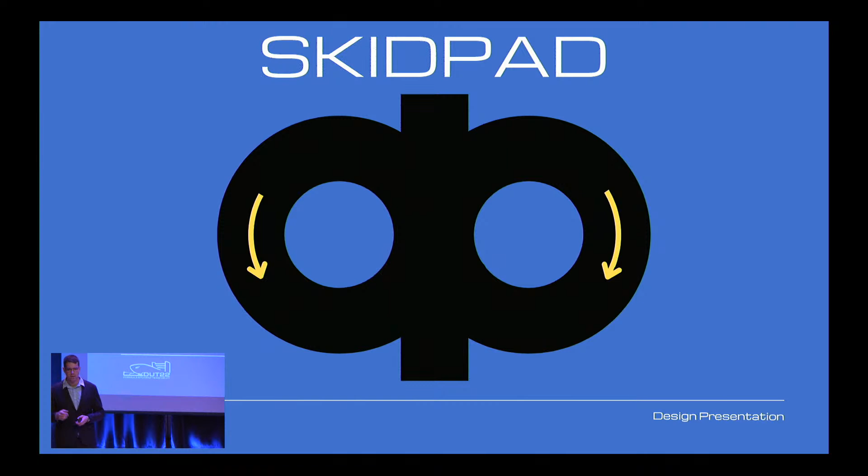As for the next dynamic event, it is the skid pad event. The real advantage of this event is, especially for the more mathematically oriented engineers, they get a steady state in which to examine the performance of the car. So if we show you some footage, again from 2015, they wet the track just to make it more interesting. And you'll see the car is going quick, but it's not speeding up and slowing down.

The driver is trying to find the optimal position to put the pedal at, to find the exact limit of grip, and because the corner radius isn't changing, he can hold it right there, which means you can literally calculate, theoretically, how quickly the car will do a skid pad on the back of an envelope with a pen and a piece of paper.

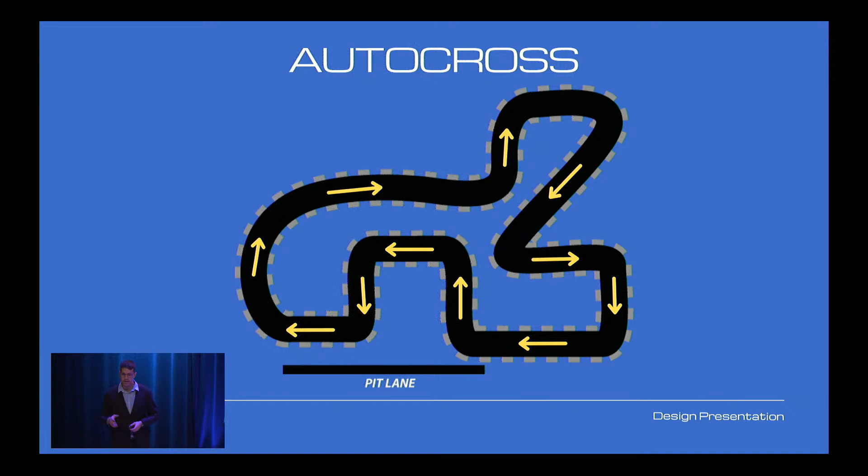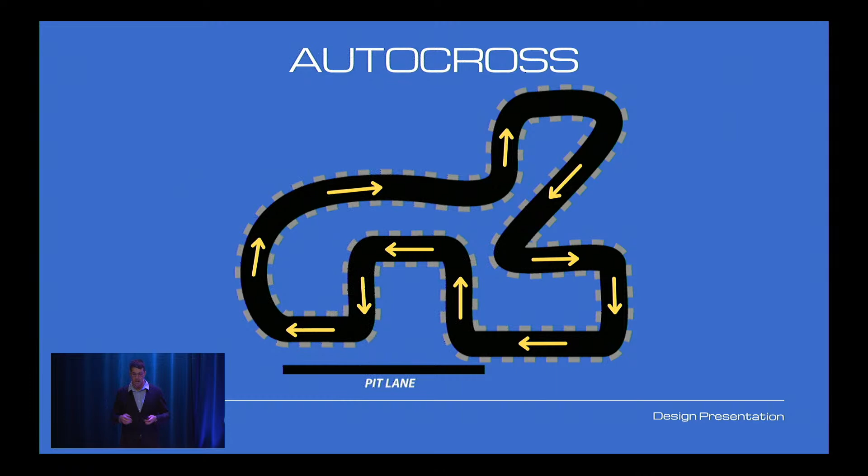Now we start getting to the dynamic events that we'll be more familiar with, especially if you're a fan of motorsports. The first is the autocross, and this is similar to qualifying. The catch is that in qualifying in Formula One or in NASCAR, you get practice. You get hours of practice before your run. For us, the closest thing that the drivers get to practice is you'll have 2 drivers for the autocross. Each of them will get 2 runs, but before they actually do that, they get to walk the track for about 20 minutes. So they've got to make a 3D image in their own mind, remember where the braking points will be, having never seen it, and then get in the car and try to do this.

That is just over 1 kilometer in 55.39 seconds around a track with more than 50 corners on it. I've seen this video more than 100 times, and it still surprises me how quickly they go. This was the first run on the day in Formula Student Austria back in 2019 at the Red Bull Ring. The second driver reviewed this footage, got in the car, and beat that time by a full second. So that's the autocross event.

Finally is the endurance event. This event is worth as many points as all the static events put together. It's included with the efficiency, just like it used to be back in 1981.

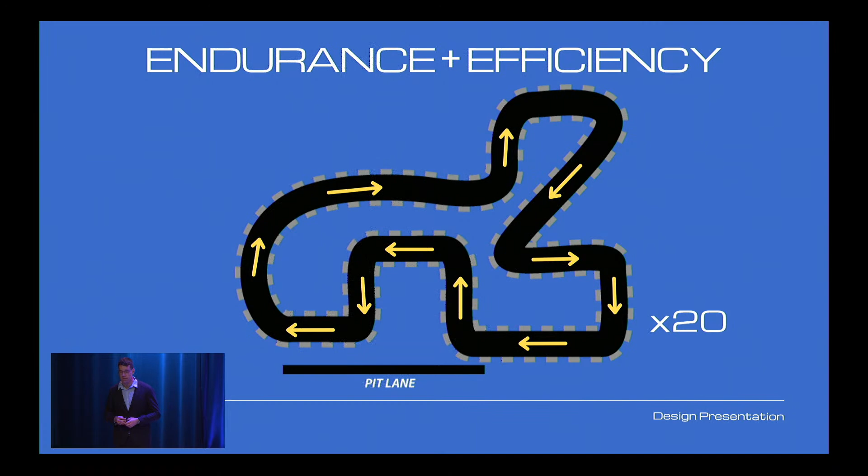And because it's the most difficult of the events, it defines a lot of how you design the car. You need to have a large accumulator in order to be able to finish this event. And then, of course, as Sam will explain, the car has to be reliable enough to do it. It might not sound that difficult, especially in comparison to something like Formula One, where it's 300 kilometers. But to start from nothing and design and build a car in 1 year to be able to finish this event, what we actually see at competitions is that only about 50% of the teams who start finish.

So now we know what the competition is. This has been clearly defined since 1998. And in 1999, seeing the success of Formula Student UK the previous year, the TU Delft in the Netherlands took notice and decided to join in on the fun. And so we built the car that you see over there, the DUT1. It was a proof of concept. We were trying to figure out how to actually do this. So we founded Formula Student Team Delft, and there's a picture of the car in testing.

And of course, even though we just wanted to compete, we just wanted to show up and actually get a car to the starting line, the TU Delft students weren't going to start with something relatively simple like a space frame, which is made out of steel tubes, for their chassis. They went all out with a carbon fiber monocoque from day one, just like they use in Formula One. And they even put a massive wing on it, which you can see in that picture. It's so big, sometimes you don't notice it, but it's right above the main hoop over there. Of course, a large aerospace faculty, not to be left out.

But the car worked. It did what we needed it to do. It took 2 years, and the DUT01, DUT is for Delft University Team. We could take that title because we were the first dream team, as they called it. It made it to the start and indeed the finish line of Formula Student UK in our very first outing.

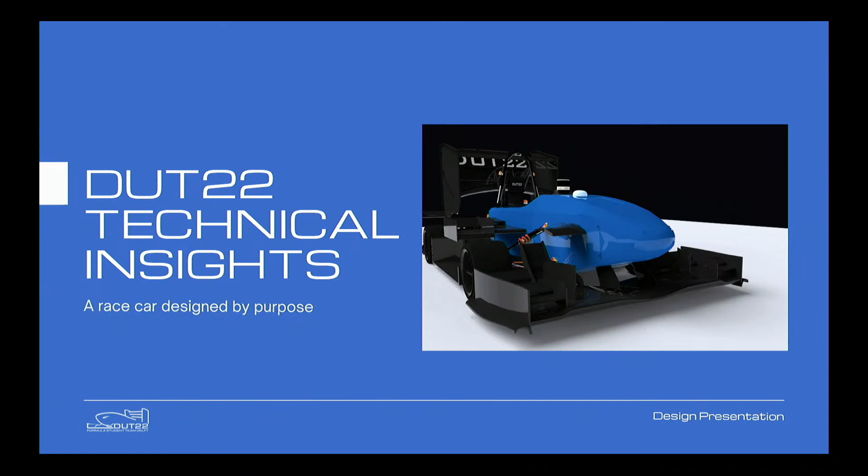I mean, wow, what an amazing car. Look at her. Ladies and gentlemen, you've just witnessed the reveal of the DUT22. I am Sam Pijnenburg, I'm the chief engineer of DUT22, and well, let's just say I'm very glad that you've been able to see this today. My purpose for being here is to take you through our design, what made our design in the beginning, what focuses we have had over the course of this design period to make this the fastest and most consistent car as per our team goal. I will also give you a bit of an idea of what it is like to create the magic and what sort of magic goes into our car actually driving. So let's kick it off.

To give you an idea of where we start, the question that we need to answer is, what does it take to win? We want to win FSG? Great, but how do we do it? Turns out that this question sounds a lot simpler than it is to actually answer. And while that is absolutely no problem, it took a lot of deliberation on how we actually were going to get there at the start of the year. And actually still, throughout every single day of designing, you find yourself wondering this same question again. What does it actually take to win? And where should we go from here?

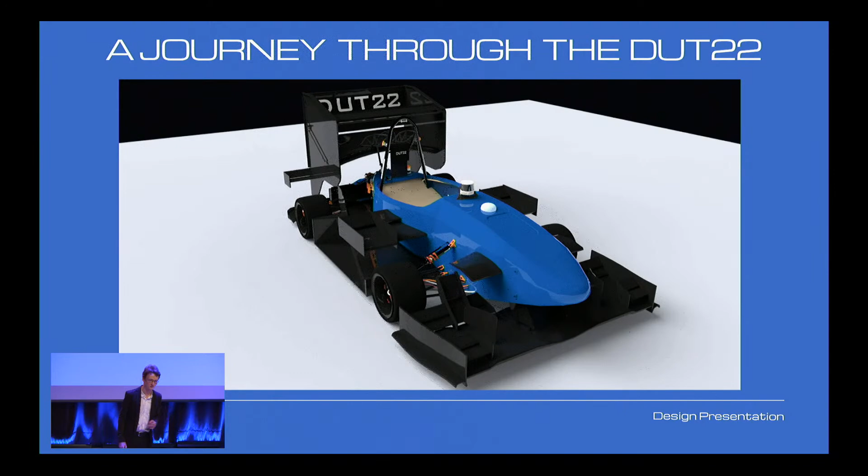In the meantime, we also want to make sure that our driver is comfortable within the car. So fortunately, we have the ability to, within a matter of seconds, change the position of these pedals to accommodate each different driver in our team. Meaning that during the driver change in the middle of our endurance event, it's a matter of seconds for us to adjust the pedal box to accommodate the driver's needs and preferences.

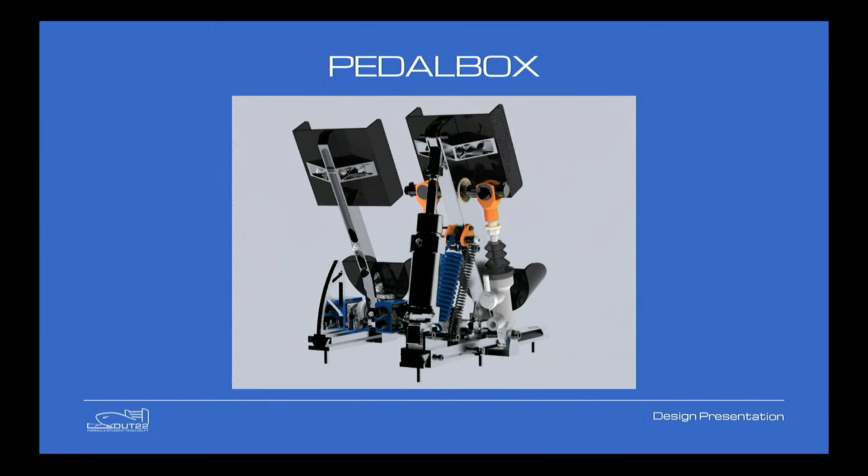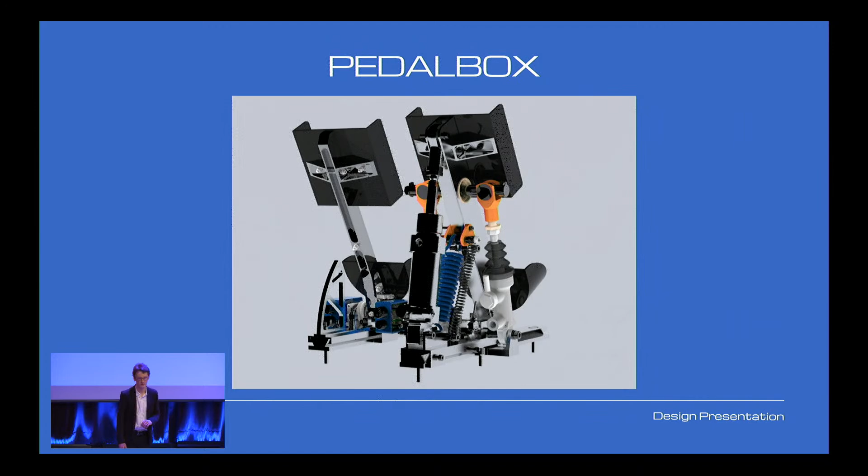Now, the thing is, we have this data then from our driver pressing the throttle pedal. Where does it go? And how does it get there? And this is where the electronics department comes into play. And first of all, specifically, the wiring. Our data from those sensors travels through the wiring, which spreads all out the car, and actually forms the highway network of our car. It connects to every single electrical component you can possibly think of, including sensors and circuit boards and whatever else. And all this wiring, which stretches for more than 1 kilometer, will also ultimately provide us with a car that actually retrieves all the data from all the points that it needs to come from and goes everywhere where it needs to go.

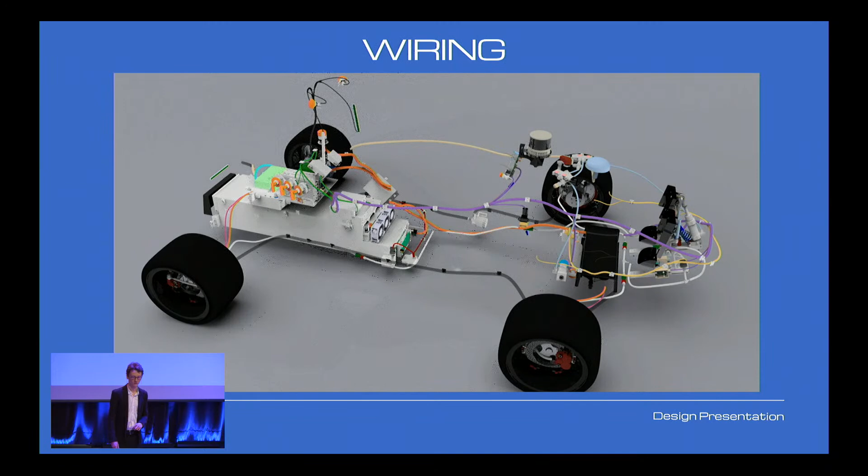Then, with the driver now able to press our throttle pedal and the data actually being able to go anywhere we want it to go, where does it actually go? To a place called the VCU. The VCU, short for Vehicle Control Unit, is a self-developed PCB, printed circuit board, that controls basically everything about our car. It is, if you will, the brains of our car. It also runs something called the controls logic. And the controls logic is responsible for doing all the calculations to provide power to each of the motors in the most optimal way.

To give you a bit of an idea, we have got our signal for the throttle coming in, and 4 motors that independently need to be actuated. So in order to do so optimally, making sure that we actually use the tire grip that we have available at every given time, this VCU does a whole lot of complex computations to make sure that we send power to each of the wheels in the best configuration, such that at any time point, we receive maximum overall torque on the car and actually get maximum performance out of the car.

At the same time, by the way, fun fact, this VCU also provides us with Wi-Fi and actually allows us to read out live telemetry, meaning that we can track everything the car is doing at any given point during testing and during the competitions, which is actually a great feature to have, because it allows us to spot issues right away that we can then quickly fix.

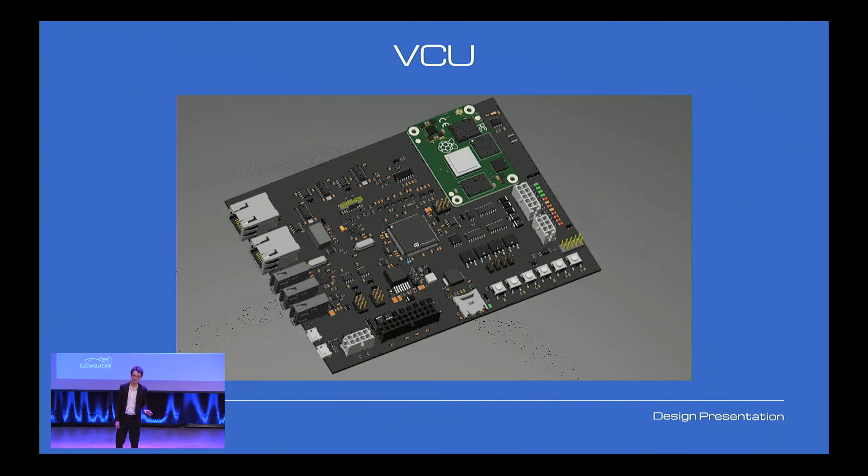Now, the controls logic then calculates exactly what torque needs to go to the motors. But unfortunately, the VCU itself isn't able to provide the power needed. So the data is instead sent to something called the motor controllers. And these motor controllers are something truly very special in our car. They are actually the combination of a whole lot of different disciplines and a whole lot of different people working together tirelessly to make these motor controllers work exceptionally well.

The primary function of this piece of electronics is to provide power to the motors and also retrieve power from the motors and put it back into the battery. So the thing is, the battery is working on DC power. And DC power is like you will find on a regular battery. It has a plus and a minus, and that's it. Now, this power somehow needs to be converted to alternating current, like you will find in your wall socket. And the issue is that it is quite a tedious process and rather hard to control.

However, through a lot of effort and quite some years of development, we've actually been able to do this very well and very efficiently. So these motor controllers are not only able to supply our motors with the AC power that they need, but also retrieve that power, slowing the car down as a sort of braking, regenerative braking, and charging the accumulator again. And actually, that gives us extra efficiency, more points.

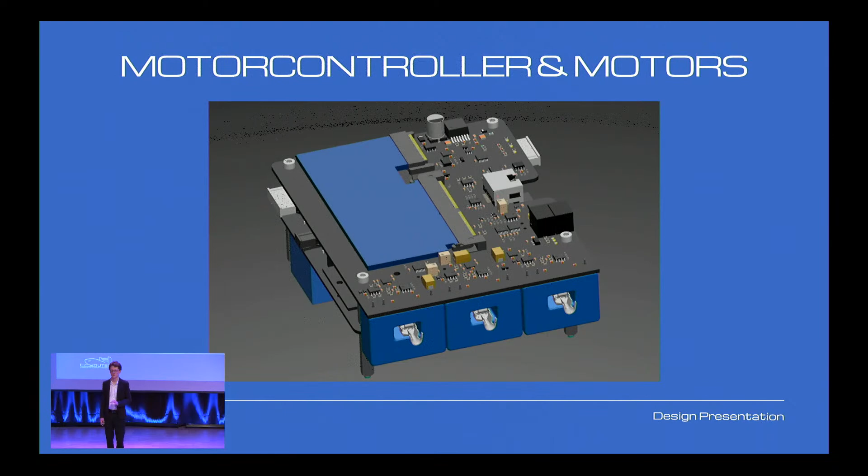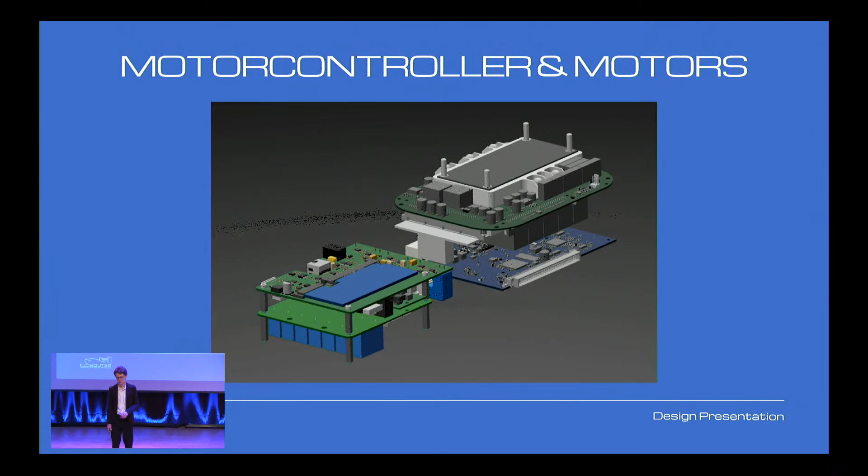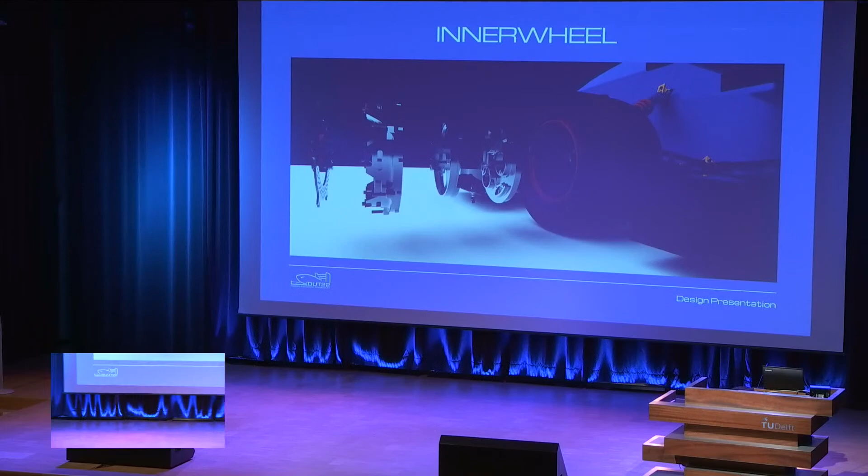Now that we know how to actually power our motors and turn electrical power from our battery into motion, we are going to have to convert that motion into powering our wheels. And the way we do that is through the drivetrain, or the inner wheel. So we've built a transmission, which is, again, custom designed and built, and it consists of several rather complex-looking elements to create one absolutely tiny gearbox. In fact, you'll find 4 on the car, 1 for each of the wheels, each powered by its own motor. These actually fit inside our tires and provide the most lightweight solution you can possibly think of.

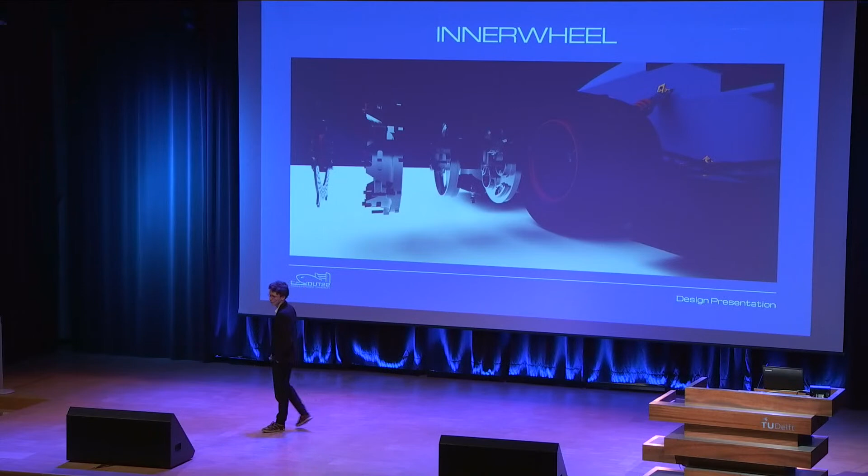Now, the tricky thing with designing these drivetrain concepts is that while they are extremely light, which is great, they are also very small, meaning all parts need to be small and designed very tightly. At the same time, we also need to make sure that it can actually withstand all the forces and do so reliably, because the cornering forces that we experience are rather high.

Now, we've covered quite a lot of the journey already. We've had the driver press the throttle pedal, data being registered, sent to the VCU, controls logic figuring out exactly which of the 4 motors needs what amount of power, and then applying that power to the motor through the motor controllers into our drivetrain. And that's when one extremely important step is still missing. And that important step is black magic.

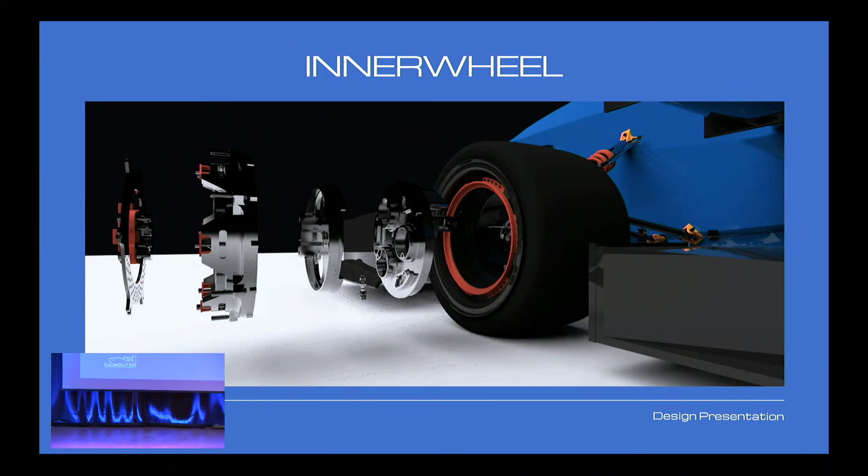Literally, the tires. Here we have one of our examples. And as you can see, it's also tiny, which is a good thing, because again, that means it's extremely light, much lighter than any other you'll find. And these tires have also been self-developed in cooperation with Vredestein. And they've been serving us very well. These tires, as far as we know, are definitely the smallest you will find at any Formula Student competition, and have an absolute ton of grip. So these tires are truly magical.

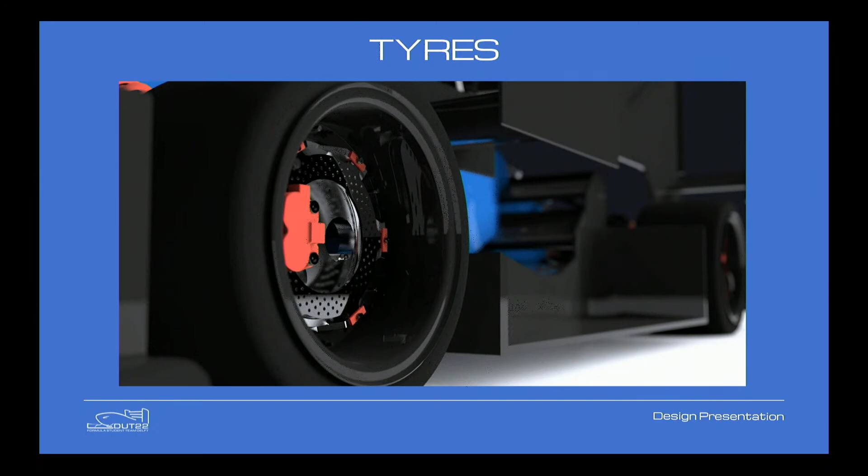Now, tire manufacturing in general is pretty magical, but this is truly astounding. So with these tires, we are actually able to put any torque that we put through our motors through the drivetrain onto the ground. Great, you think, we can accelerate. But no, because now you press the throttle pedal and, well, your tires race off. Unfortunate. So there's some steps missing in between.

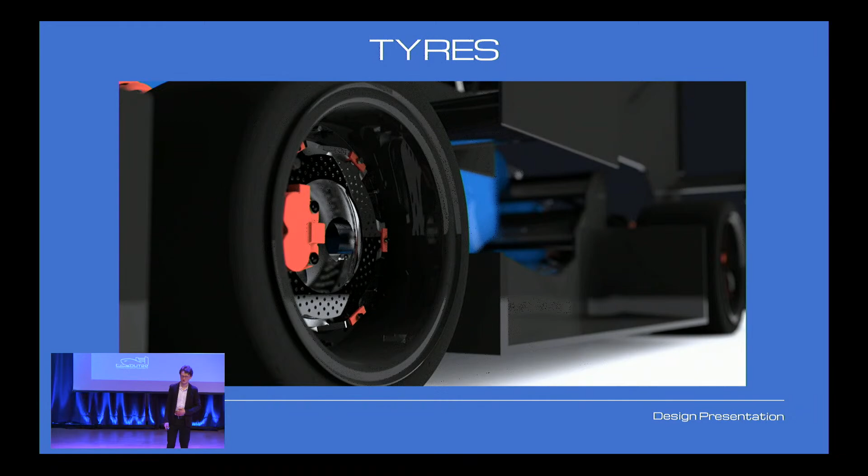And one of those steps is the task of the suspension on our car. Now, the suspension system on our car, again, is quite tricky to figure out. And the reason for that is because our wheels are so small, there's very limited space to play with. So a lot of time goes into suspension, iterating with vehicle dynamics, the department also responsible for the controls logic, to actually make sure that everything fits and also performs optimally.

And what do I mean by that? To perform optimally, we need the car's tires to be at exactly the right place at exactly the right time, be that at angles and also during bumps, cornering, steering, everything. If the tires are not at the optimal position that they can be, then there's no point and we can't extract maximum performance. So we need to make sure that we optimize this design and optimize all the attachment points for the suspension to make sure it works perfectly.

Some other interesting features is that the suspension department actually probably provides the biggest amount of adjustability there is. And this will always add to extra drivability, because any driver would actually be able to have their own setup on the car and actually figure out what it is they prefer.

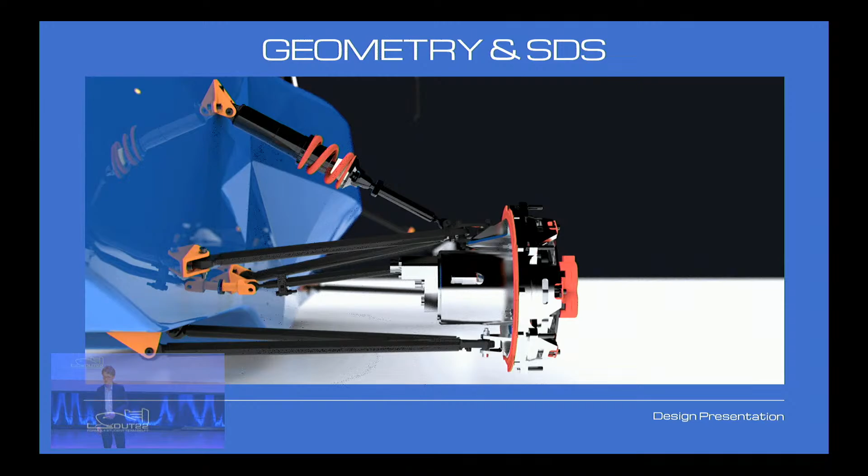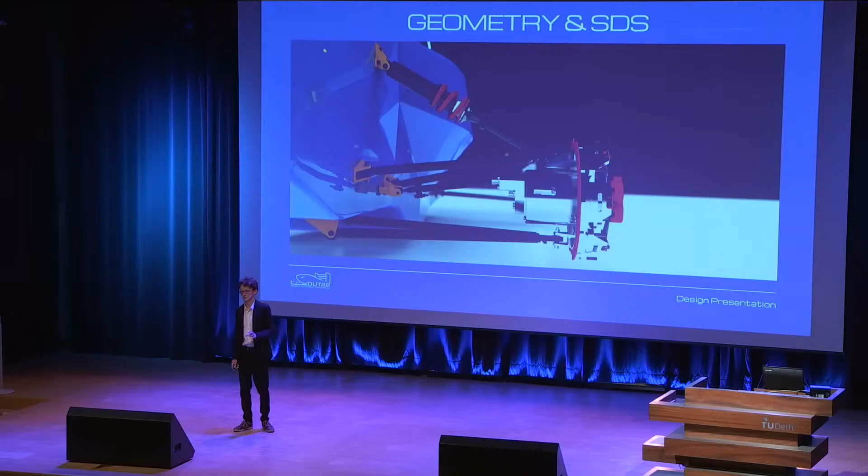That's great. Excellent. But there's another challenge. Because of our extremely high cornering forces, we also need to make sure that everything is actually structurally sound. If it's not structurally sound, we'll see the tires racing off the moment we turn into a corner. And unfortunately, that's no good. So you'll see the suspension department also working hard to run all the simulations necessary to find out if all parts are actually all in order and actually capable of handling all the incredible loads that we see.

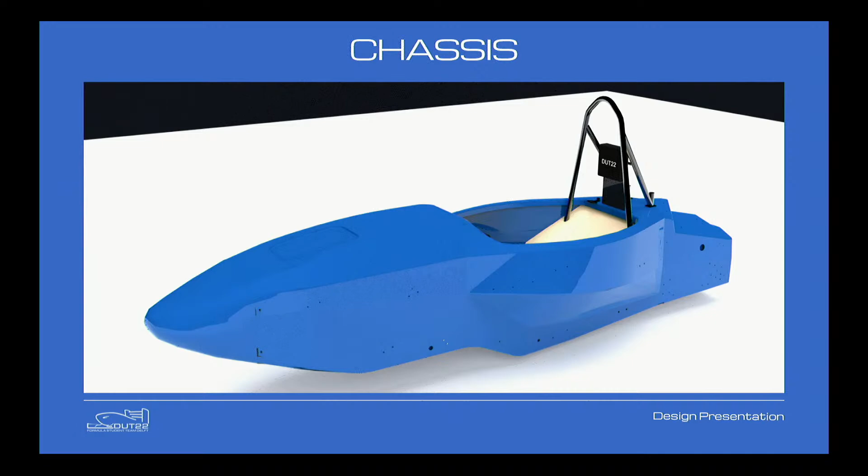So now that we've attached our tire and our whole drivetrain to a suspension, we still need to attach our suspension to, well, a car. And what I mean by a car is actually the chassis. And this is the chassis. It's a carbon fiber monocoque. Carbon fiber because it's so extremely light. In fact, it is only 25 kilograms. And at that weight, if her knee gets better, my grandmother would be able to lift it.

So the thing about the chassis, what makes it truly extraordinary, is that it's made out of, well, carbon, and yet able to resist extreme loads. It is able to resist impacts at 40 Gs from the rear, the front, and all the sides, while only weighing in at 25 kilograms. Moreover, it has to house the battery, the driver, and all sorts of other controls electronics that we could ever put inside of it. It also needs to attach to the suspension, making sure that the wheels stay attached to, well, the car.

So now at least we're complete. Now when we press the throttle pedal, the car will actually move. And it will move fast, believe me. And that's great. The car is light, the car is fast. We've got our throttle pedal connected to our VCU, making sure that we actually get all the performance out of it in the controls logic, then actually controlling the motors through our motor controllers, ultimately turning the drivetrain, turning the wheels, the suspension then driving the car forwards, and then the chassis actually moving forwards.

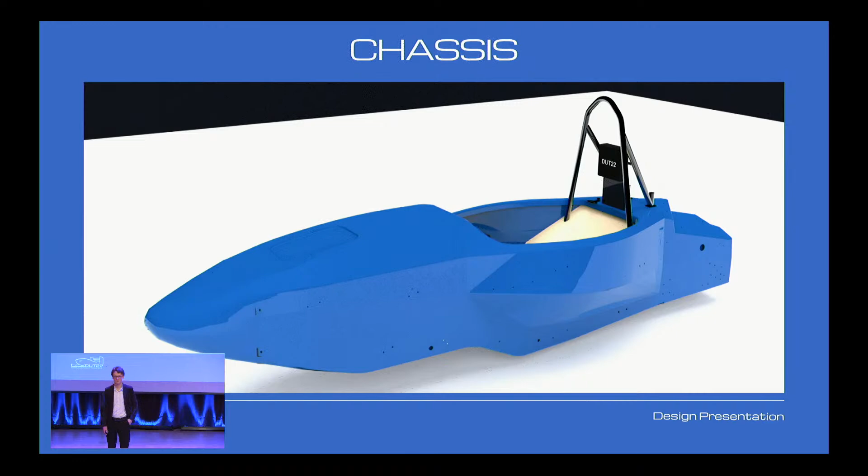But then we get to a corner. So this is where the fun stuff starts. We can press the brakes, that's fine, that works just the same. But the issue lies in, well, we want to be able to corner as fast as possible. And to be able to corner as fast as possible, we want, again, maximum grip out of our tires. And maximum grip out of our tires is the one thing that always contributes to our performance most. All the forces on our car need to go through the tires. So having tire grip available and more of it is absolutely crucial.

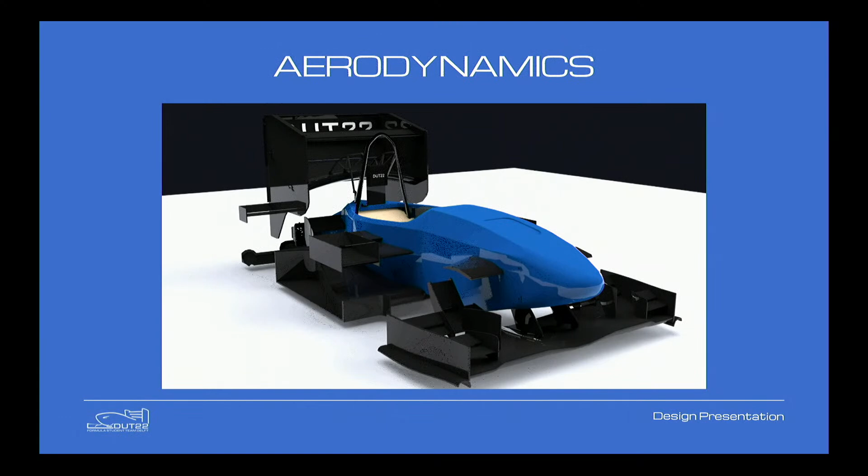Now the trick to doing so is something called aerodynamics. So our aerodynamics department works tirelessly to create something called downforce, which will actually add to our tire grip. To give you a bit of an idea, we create wing elements on our car that will actually push the air up as we drive through it, and in turn then press the car down into the ground, making sure that our wheels are firmly planted on the ground as well, adding extra friction and thus tire grip.

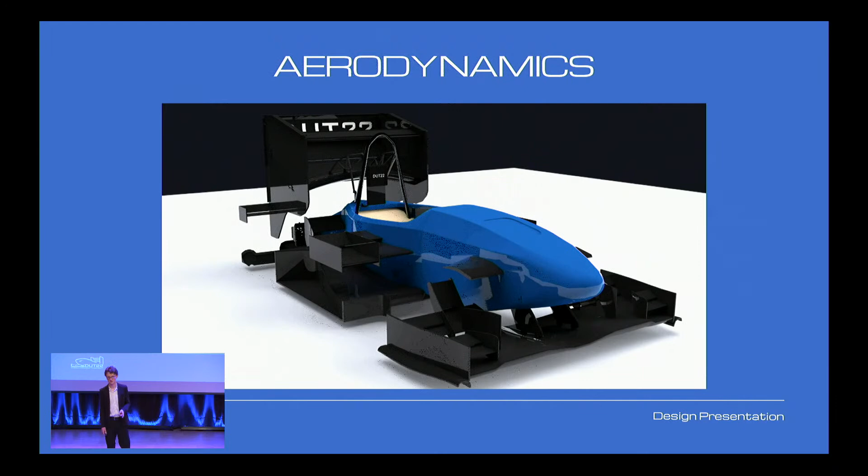That's great. So now we have extra tire grip, and that means we can corner faster. That's great. It takes time off our laps, and that also means that we get extra points and thus a higher chance of winning.

But here's the catch. It's quite hard to design aerodynamics in a way that actually makes sense. And usually when you design something, it tends to not immediately make sense. So that's why we do a whole lot of simulation. And the interesting thing about the simulations that we've been able to do this year is that they are far more accurate than they've ever been before.

So essentially what CFD, so flow simulation, does is generate pretty pictures. And these pretty pictures, as you'll see behind me, actually give us a lot of information about what the car is doing, and specifically what the airflow around the car is doing at any given time. So here you can see one of our cornering simulations that we've actually been able to properly implement this year through the extreme efforts of our engineers.

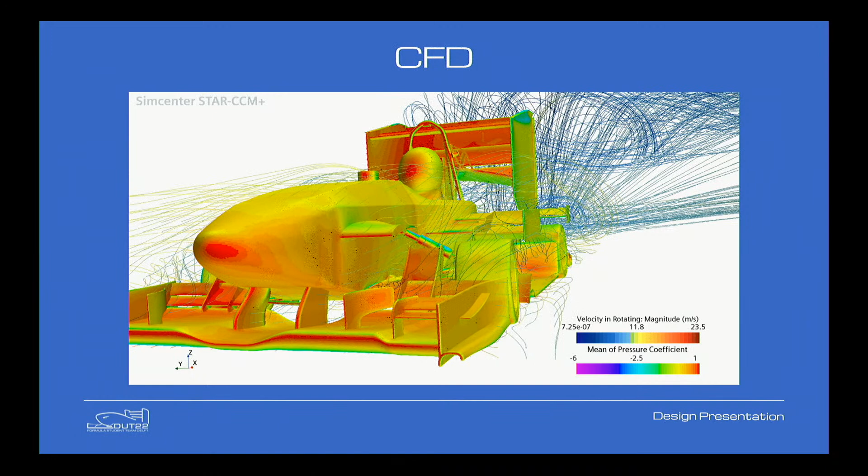And it has already taught us a lot about how the car actually handles in more realistic driving cases. Meaning that the performance we have on track will now actually be closer to the performance we expect due to these simulations. And that's great, because now we can further optimize our aerodynamics package for the actual on-track case, extra performance. Thus more points.

Fantastic. But now there's a problem, always a problem. The problem is the following. In pushing the air up and pressing the car down, the extra elements that we add also contribute to something called drag. So now that our car is actually able to generate downforce, it is also harder to push it through the air.

And that means that we have lower top speeds, but specifically less efficiency. Because all this effort that goes into driving the car through the air is ultimately energy that's lost and that we cannot retrieve from the motion of the car, and thus not recharge the battery with. And losing that energy, losing efficiency, is going to cost us points.

So, naturally we found a true engineering solution. Simply what we do is we open some of the elements on the rear wing, called DRS. You may know it from Formula 1, the drag reduction system. And essentially what happens is that the two upper elements of the rear wing open up, letting more air through, reducing the downforce of our car, but also reducing the drag of our car, meaning that we don't have to push it through as hard.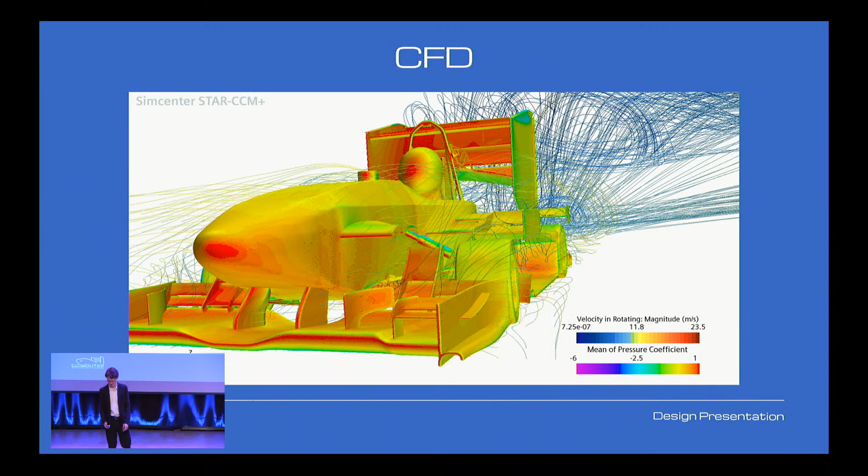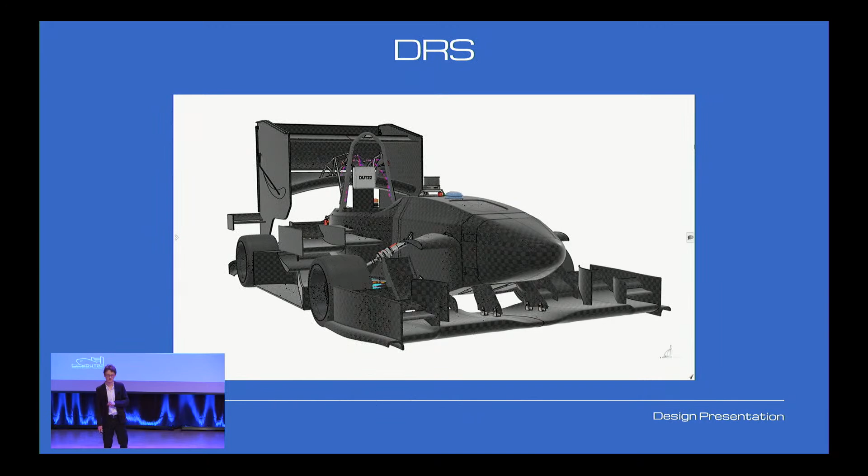But what if there's no driver? Because now we are suddenly met with two extra events that we have to deal with. How are we going to ever deal with not having a driver in our car? And it turns out that there are some key issues that we can actually identify.

Starting with the first, which is not being able to see. A driver is able to see around him, but the car can't, at least not right off the bat. So we mount a sensor on the car, called the LiDAR, which shoots out infrared rays all around it. And a lot of those infrared rays are reflected back into the sensor, and then the sensor gets a feel for how far certain items, points in space, are away. It gets a sense of what is around it.

Now the trick is then to use a lot of clever mathematics and software to deduce where certain cones are in space. This is no easy task, but definitely something that our engineers have been able to figure out rather fast. So what we've been doing is we've been running around our LiDAR on a handcart.

So some of our engineers have been working out. And they've been running skid pad tracks for ages, trying to get data of skid pad tracks and actually seeing if the LiDAR and the software that they've produced would be able to detect cones. And, well, as it turns out, it's definitely possible.

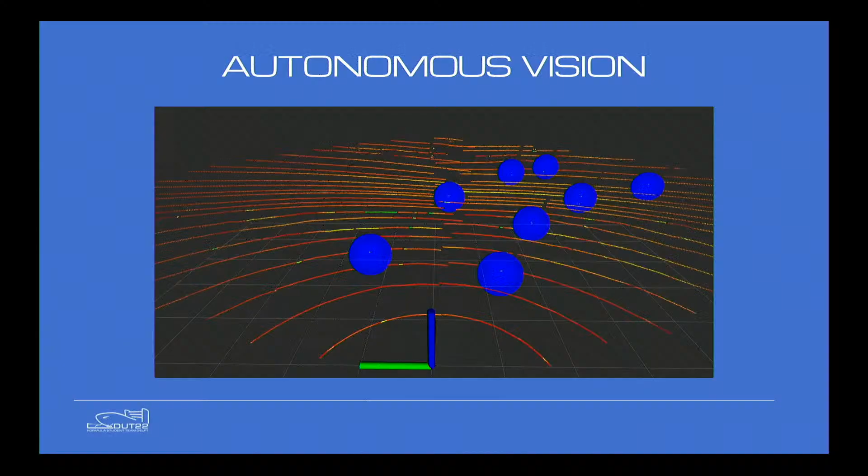So here you can see the handcart driving around the skid pad and all sorts of blue dots lighting up, which are the cones. And you can also see that the skid pad track is even somewhat recognizable. So great, we can now actually detect cones and see where we're going.

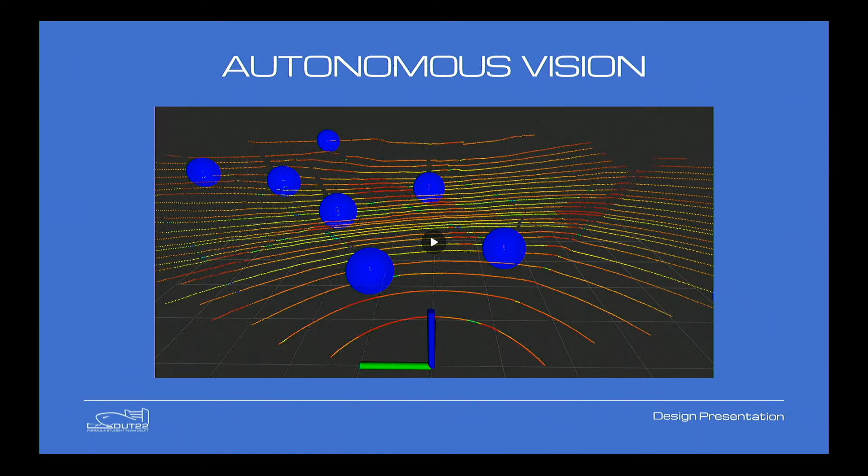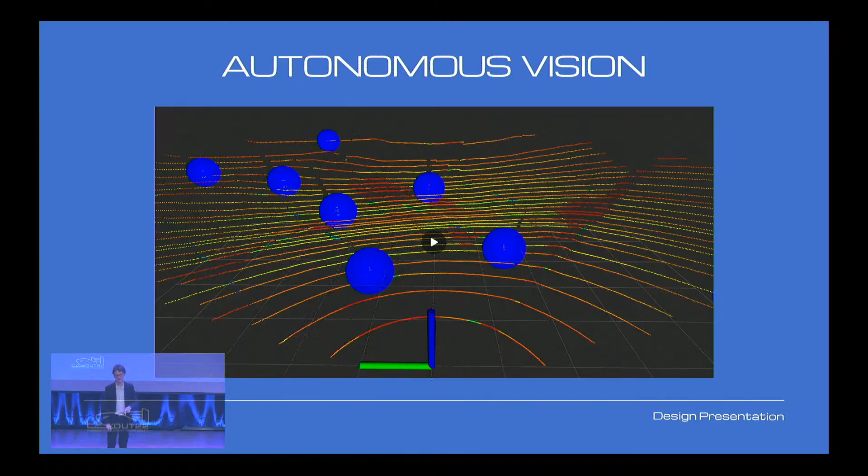The next step, the next problem, is that now we have to actually build a track out of this. And not only build a track out of this, but also actually see what the fastest path is through the track, and then have the car drive itself, have it control the steering, the brakes, and the throttle. So in doing that, we find that we have a challenge. We cannot actually test this on the car, because there's no car yet.

So instead, what we've decided to do is build a simulator, naturally, as one does. And this simulator will allow us to run all the software before the car even exists, and sort of figure out all the physics that we actually will want to have on the car, and all the controls that we will want to have on the car, exactly in such a way to make it drive the fastest possible.

In fact, we've had the simulator run against physical drivers, actually drivers from previous years, like the one you saw in the video just now at the autocross in Austria that Anton showed you before. And actually, they were beaten by at least a tenth of a second or over. So the computer is already pretty fast.

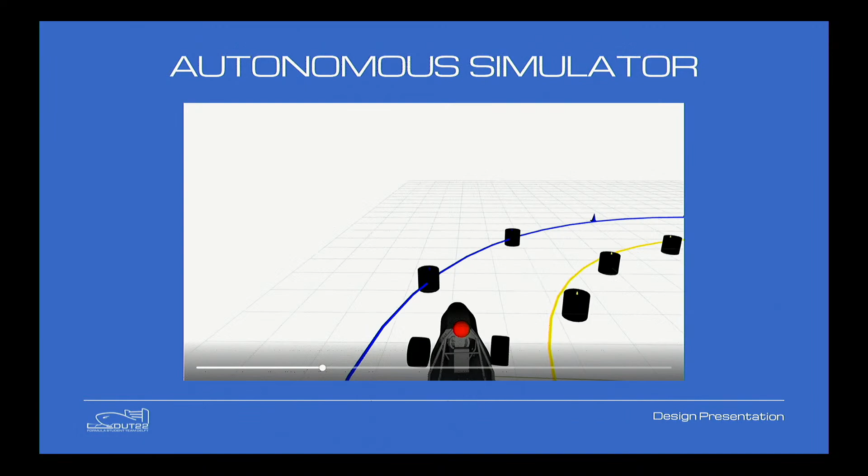Now, to show you how that looks, I've got a bit of a video for you again. This is the car actually running, if it works, the skid pad. And you can already see that some of the cones have cylinders on them. And those cylinders actually are cylinders that the LiDAR has already perceived. You can see that there's also lines that the car is actually drawing by itself to indicate the circles of the skid pad track, its limits, and in green, a track that it's actually driving.

You can see that also its second lap is much faster than its first, because it already knows the track and is actually able to accelerate much faster. Same happens for the left-hand side. Again, the second lap being much faster than the first.

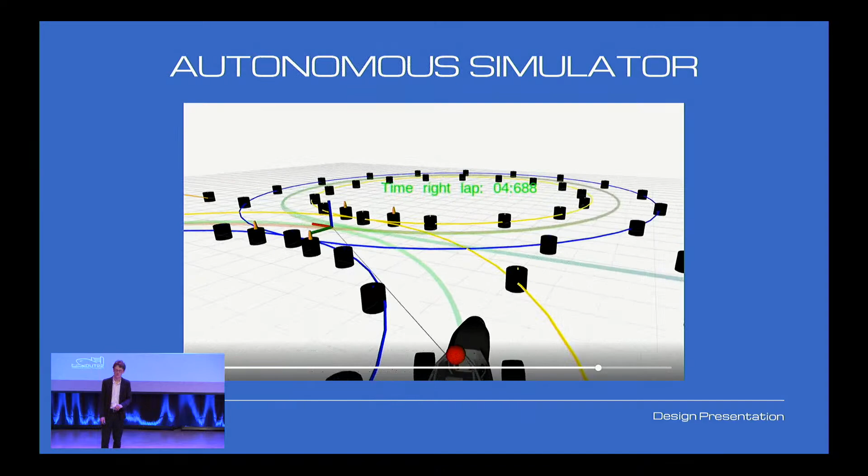So now that we're not only able to see the track, but also actually create the controls that we need to drive the car around the track, we're golden. Well, we still have to build the car and test the software and do all the other stuff, but at least the simulator works, so that's great.

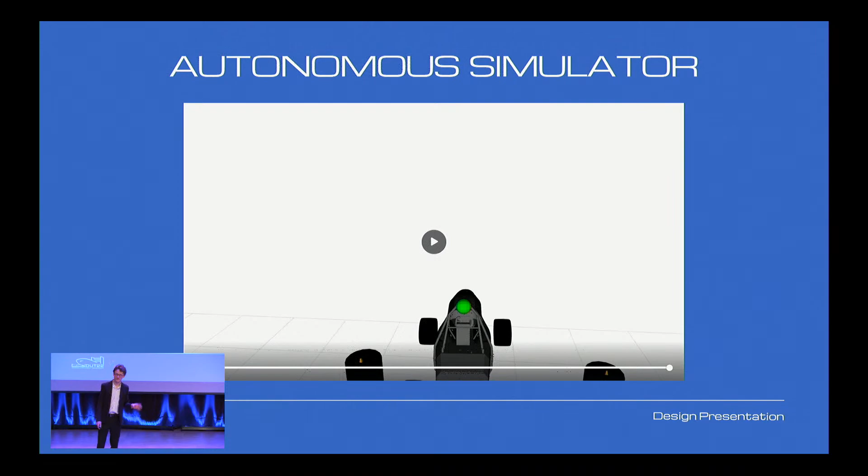Now that our car is actually able to not only drive, but also drive itself, and in every single event that we could possibly think of, I still want to share some stats with you, and some things that you will find undoubtedly quite impressive. So we've run some calculations together with the vehicle dynamics department, as one does, because they are in charge of all the numbers on our car. And we found some fun numbers for you.

So first of all, our car would be able to accelerate to 100 kilometers an hour from standstill in 1.86 seconds. Quite impressive. But even more impressive is that in driverless mode, our car will be able to do the exact same feat in only 1.55 seconds. Yes. Quite incredible.

Now, our car also is quite powerful. It provides 1,257 Newton meters of torque. And to give you a bit of a reference for this, a Formula 1 car in its current era, the V6 hybrid engines, produce around 800 Newton meters of torque. Well under our number. Now you also get a sense of why it is so important that we design our drivetrain so well, because these numbers are ridiculously high.

Now some other interesting numbers. We can pull 3.3 Gs under braking. Well, I mean, brace for impact. And actually, it is possible, at least theoretically, to drive the car upside down at 111 kilometers an hour. We are still in arguments as to whether or not we actually want to try this.

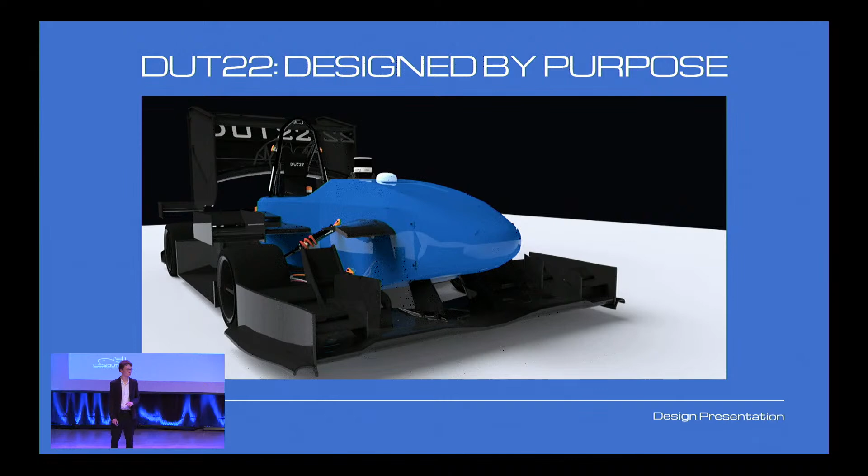And all of this is to create this car, the DUT22. This car really has been built with reliability, with drivability, and with performance in mind, and tried to find the optimum between the three. This car really has been built to do only one thing, and that thing is to win FSG. And as to why we want to win, I think no other than Anton Deken should be joining me on stage to explain to you why that is.

Thanks very much, Sam. Now that we've seen all of the intricacies behind the design of this car, you might be sitting at home thinking to yourself, that seems pretty complicated. It's because it is. It's a complicated task. And we have a team of 90 engineers whose predominant preoccupation for the next year is going to be thinking about this car and how to get the whole team to win.

And I think it's a fair question. It might go without saying, obviously you want to win, but I think it's worth asking why. Why is it worth putting this much effort, making this many sacrifices to achieve this goal? Well, just as in 1980, they started the competition in order to make engineering students better engineers by the time they left, mainly by giving them practical experience with a real event.

That competition has now gone from having 4 competing teams to having 800 teams from 600 universities competing from all over the world, from Japan to Thailand to India to the United States to Brazil. There are teams competing in this event. Out of all of those events, Formula Student Germany is the most competitive one.